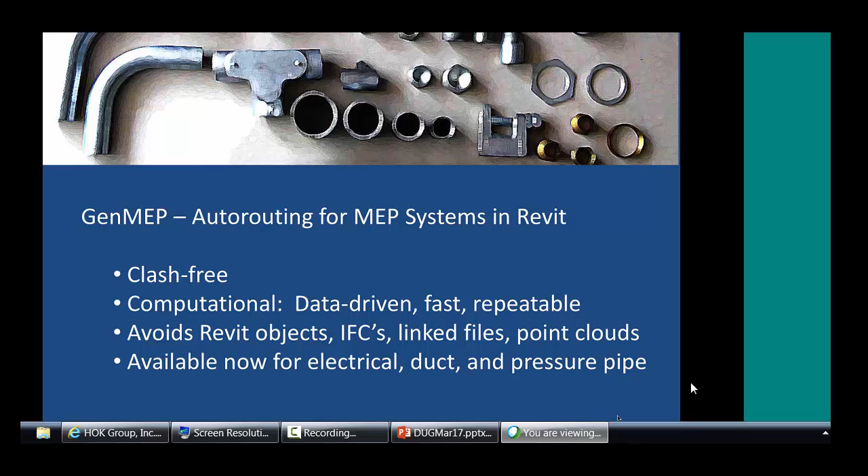And then quickly walking you through the two products that we have. GenMEP is an auto-routing tool for Revit. You define a start point and end point, and it'll auto-route between the two. Ben will go through a bunch of examples showing that work and what that can do. And then ClashMEP is a real-time clash detection tool for Revit. So as you're modeling within Revit, you get real-time interactive feedback on what you're clashing with as you model. And that's a product I want to show to you and get your feedback on how it could best integrate into Dynamo.

The technology of what we do is pretty technical, and if you guys want to talk afterwards about what that means. But generally, whenever we do anything involving our tools, we create a voxel space, and then we route through that maze. So imagine building a Minecraft building from a Revit model, and then we use that to either auto-route or do clash detection against it.

And then there are a bunch of algorithms that we've customized and adapted to be in 3D and to be appropriate for buildings and to have enough intelligence to look like a conduit or look like a duct. And that's a picture of what it kind of looks like when you go under the hood and take a look at everything.

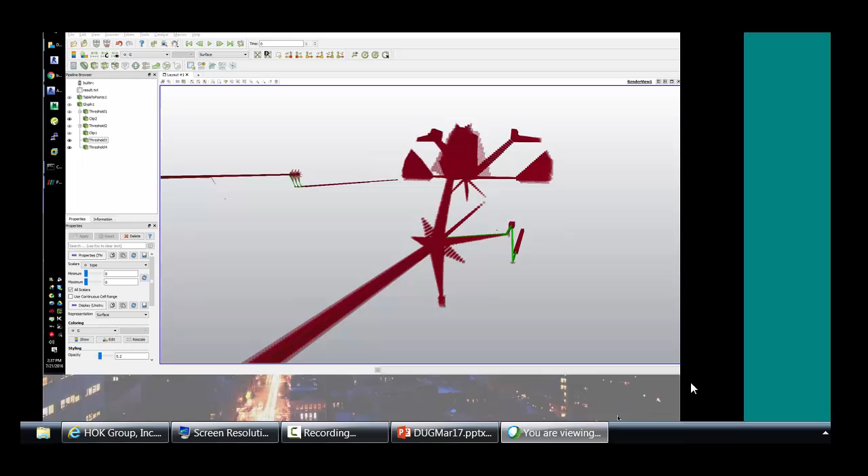So with that, I'll turn it over to Ben, and he can walk you through demonstrations of first, how to do generative design within MEP and how you come to an optimized outcome, medical equipment tracking, including the automatic placement of electrical outlets for that equipment, and then congestion complexity characterization with Dynamo.

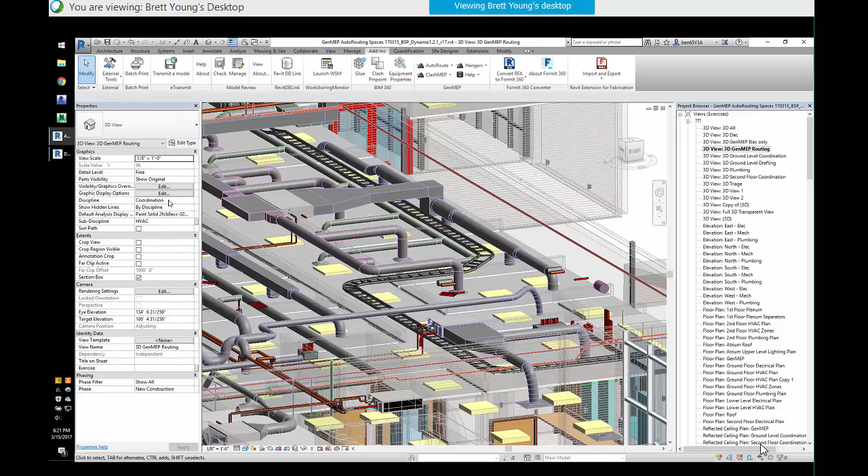the basic way GenMEP works is you click on a straight piece of MEP system, and then you click on another straight piece of MEP system, and then we route between the two. That's point A to point B. It's very simple that way. Finding the solution between the two is not simple, but it requires users to place the start and target points in a decent location, basically, for the route to be something that's buildable.

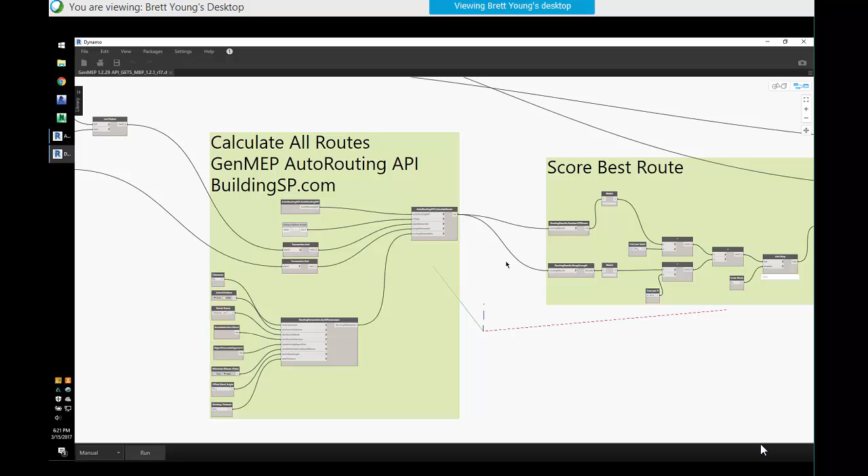And so what we've done is open up our APIs to our routing engine, basically, to route between the start and target points, and then find the solution, and then do some math behind the scenes. Excuse me. So I'm going to walk through my different nodes here. I apologize for my mess on my canvas, but, you know, it works.

So we have a couple groups here in the beginning that create what we need to route for a GenMEP, which is a start stub of system and a target stub of system. And I chose to put them in various places. So we're going to take a look at where those are located, and we'll run it. Okay. Let's just see here.

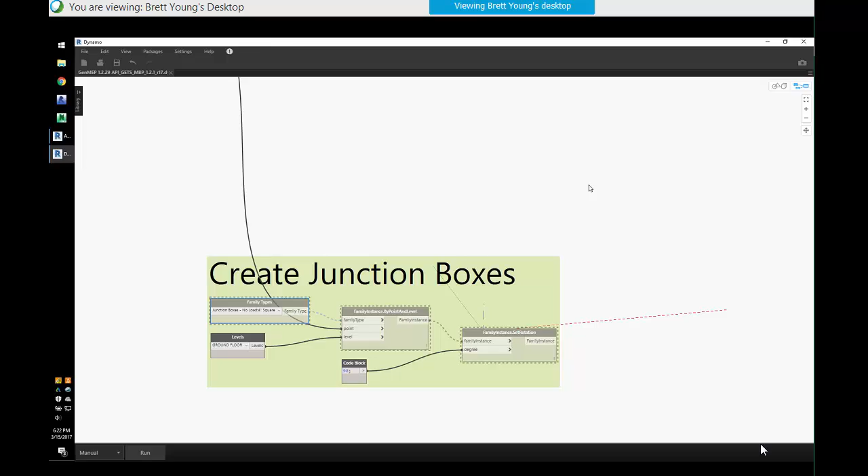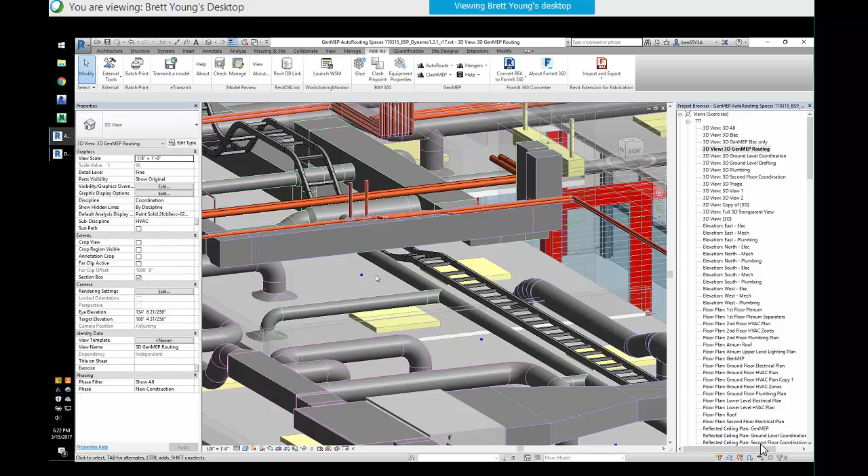So what we have is we are about to try and route between these blue points. We have 40 routes in a grid, arrayed at different elevations, and we're going to test elevations to see which is the best way to get across the building at a horizontal plane. These blue dots are the target junction boxes for home run routing. I'm fixing the location of the target and just varying the start point to figure out which is the best start elevation for this test.

I'm going to unfreeze these guys. So we've got the actual node, or actual group, to make the junction boxes at the target points look nice, and we're going to unfreeze these.

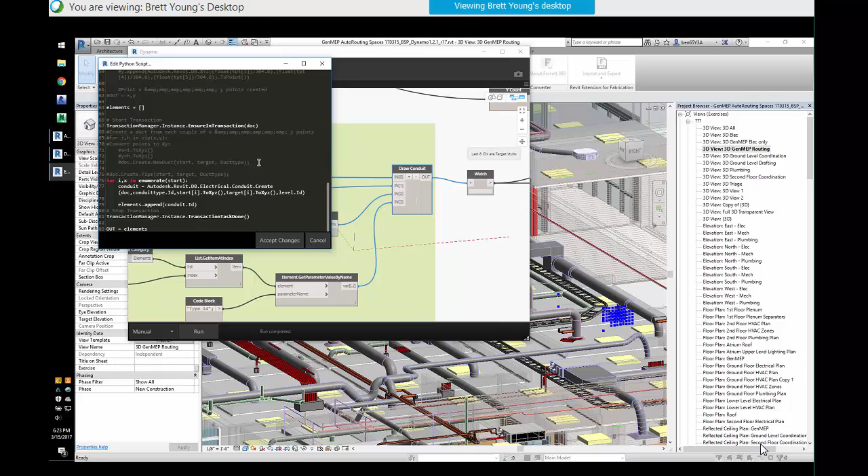I feed into this Python node here start and target information to basically say, hey Revit API, draw a 1.5 foot piece of conduit between this XYZ and this XYZ to give me a start stub. We can walk through that Python - that's where I get out of my element, honestly, in terms of what's going on. As you can imagine, you read an example online and make it work for what you're trying to do. But start to target stubs get generated, and then we feed it through the GenMEP routing engine.

So we have some choices here - the routing parameters for each of these routes. We can choose the offset bend angle. 45 degrees is kind of a standard electrical bend angle to use for routing. We're choosing to use 45, but we could vary that and input a list of different bend angles.

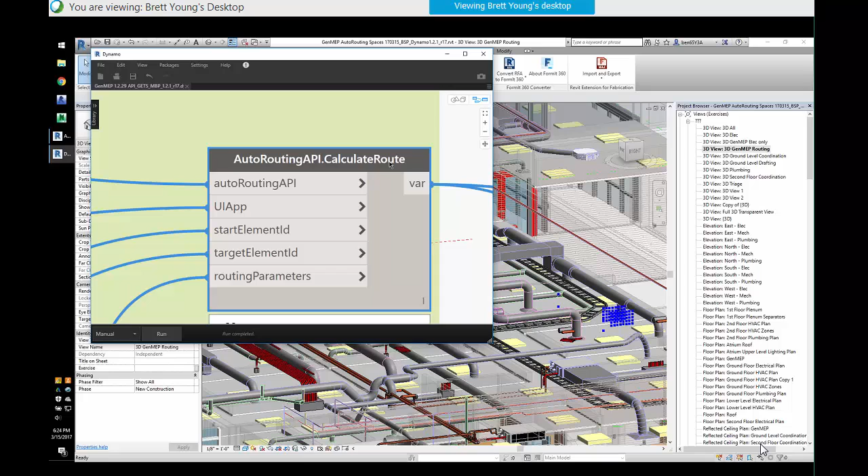There are different options we can do, but basically this right here is the key. This node is created from the Revit GenMEP DLL that we include with our installer - that's basically the routing engine. You supply start and target points, and routing preferences, and the output is solutions from the GenMEP routing engine in Revit. We just happen to make it an automated process as opposed to a manual process, the way GenMEP works inside of Revit right now.

Okay, so we're going to run it and see what we get here. It's easier with data in those nodes than empty nodes. So we're running 40 routes from various elevations, sets of 8 that work their way across the building, and we're going to get 5 different sets of scores for which elevation is best.

Is this looking for clashes now? It is finding 40 different solutions. They're all clash-free solutions, so we're running our algorithms through the maze to find 40 different routes, but they're all clash-free, so they all technically can be built - but which is the best way to do it is the question.

So if you look, we have a way to quantify a route. One route has a certain amount of elbows or bends in it. Each of these 40 routes have 7, 3, all these various quantities of elbows, and they also have different amounts of length.

So if you apply a cost function to them - and I'm doing a very simple one - it costs $13.04 for every bend, and $4.12 for every linear foot of system. Multiply that together, and for each of the 5 elevations you get a sum, a score. Now these dollar amounts might be in 2008 dollars, I don't really know, but they're comparable to each other generally at this point.

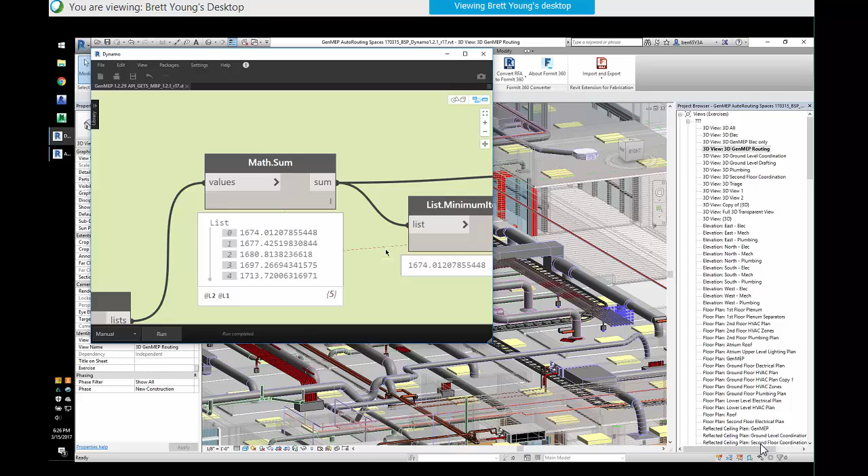So if we look at these different scores, solution set 0 has the lowest score here - 1674 is a low value in the score function that I built. Now some people might say cost per linear foot should be changed, and you can apply a whole different approach - there's a lot of special sauce that can be built into cost functions.

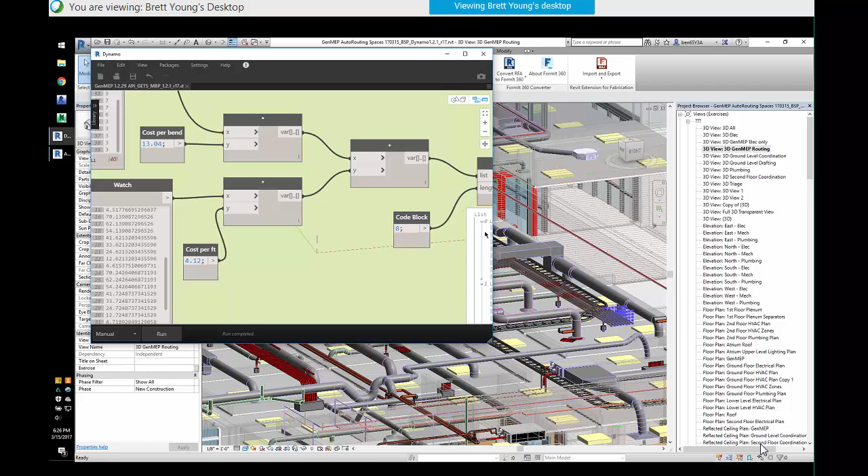So over here in Revit, you can see the blue points were my start points. The elevations above the bottom one were determined not to be the optimal solution, so I deleted those routes totally, and we picked the bottom elevation and routed it for real in Revit and kept that solution. As you can see, these 8 routes work their way across, each one dropping off into the J boxes as they hit their targets.

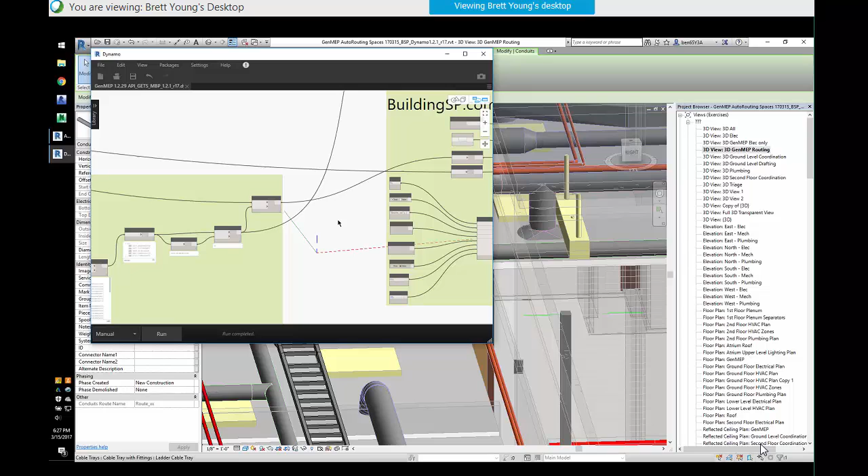So the scoring method gives us a measurable way to compare different solutions. I can add more elevations, add more granularity, and try different elevations. We're just limited by how many tests we want to run, basically, and how good of a scoring method you have.

There's a lot going on in this specific one. Go ahead.

It finds routes. GenMEP itself is a software product that finds its way through a maze by not hitting anything, using algorithms to work each route. We grab the geometry that's obstructions in a Revit model, so all geometry that's in the way, we extract that out and take a look, then use basically video game algorithms to find their pathfinding way through the maze.

We have linked models, IFC models, point cloud. So we know the routes are good, but as you can imagine, there can be some crazy solutions on finding your way through a maze that you're not going to want to build that way. By putting a cost function to the elbows and length, you can really compare one route to another and weed out the outliers to say, well yes, the wire can be pulled that way possibly, but that's not really the way it's going to be built.

So I want a pretty efficient route to get to the building part. Clearance issues are just spots that can get through, but not very easily.

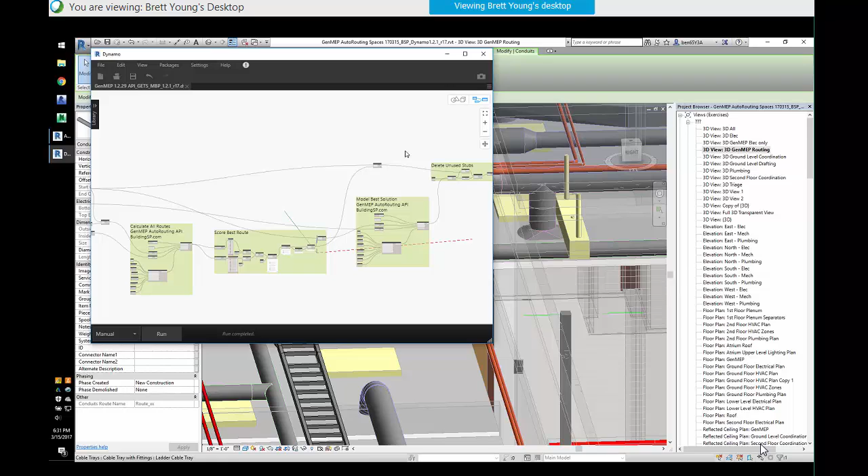Let's see, specifically in this example, they're going straight out of the start and working their way at that horizontal plane at 2'3" in the plenum, which I think is around 10 feet. So they're straight from the beginning, but then they hit that duct obstruction, so they have to go up or down.

I see what you mean. I thought you were talking about at the start, you either are at one point or another point, if you kind of go straight out from those start points, and we just run into something at some point. So I'd like to get over that duct, in theory, but the steel's in the way.

It turns out in this example that there's not enough room above the duct and below the steel to work its way through that way.

So Ben, using Dynamo, defined all these points here, and then went through and fit tested every elevation here at about a 3 or 4 inch iteration. And then we scored it again using Dynamo to come up with the most optimum group, or most optimum starting elevation for this example.

So that may not have been entirely clear, but all those things were happening when he was writing the script, and that was what the dynamo example did. Validating those points first and then generating based on what's... they have to succeed first, and then they get a score, and the best ones that actually got a score are compared to each other.

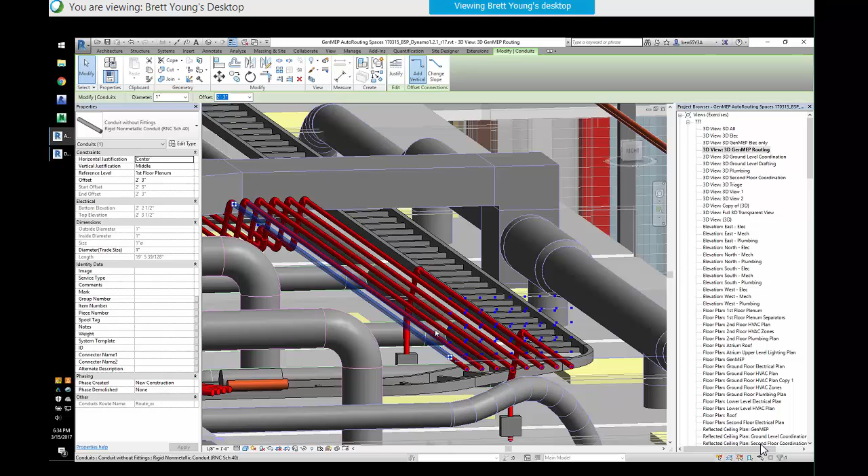Yeah, I think we only had one proprietary node on it. You want me to show some? Walk through the script - I'm just curious what's drawing in, what your inputs and outputs are.

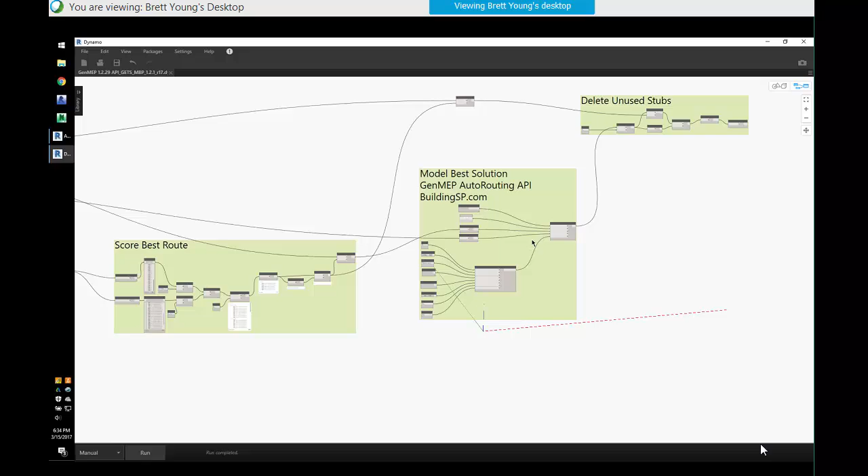What we're describing is what we call the on-ramp of optimization. So you tackle optimization in a growing way. If I have a point-to-point route, I can optimize one route. If I've got 8 of the same type of system, I can optimize all 8 of those - and this is an example of that.

After that, you can go, well, I've got 8 conduits and 1 duct, and I want to optimize those 2 systems to come up with this solution. And once you've done that, you go for all the systems, and once you go for that, you go for the entire building to optimize it.

So in that example, the good question is, if you had lowered that duct enough to get those 8 conduits over the top of it, that might have been a more optimum project solution, or it may not have been. The traditional thinking would be that duct is expensive to move and you wouldn't do that. But if that had no cost to you, you could do it easily, and it would have a savings for the project - all those conduits would be dead flat over the top.

So that's what we call the on-ramp of optimization, how we're marching down that optimization path using things like scoring. In my opinion, going after more complicated ways of scoring a conduit isn't as important as tackling how to score a duct and combining the two, because that gets into a systems approach, which is more important than refining how you score a conduit.

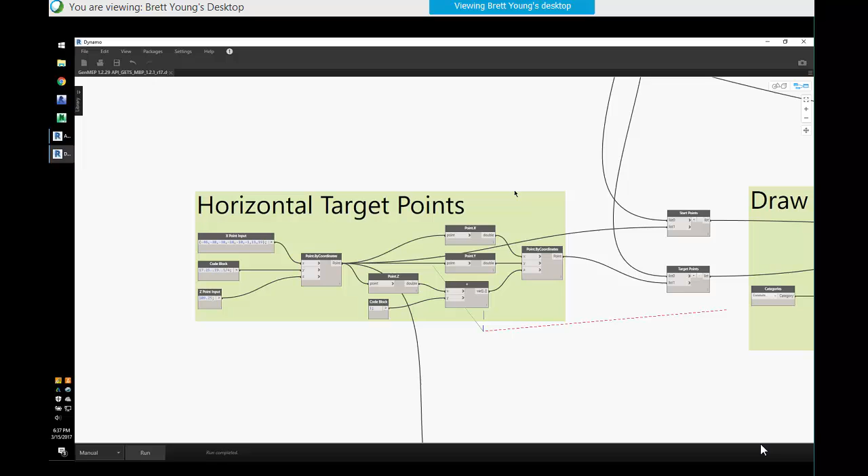So the actual Dynamo-ness of this at a basic level, you tell me if this is what you want to see, but I don't have anything complicated in here. It's just lots of out-of-the-box Dynamo nodes, list management.

But if we want to talk about the target stubs that I drew in here with Dynamo, they are 1.5 foot stubs coming out of this JBox, right? So going from a Z value of 109.25 up 1.5 feet, maybe 1 foot, is what we're doing here, right?

And so if anyone has any questions on how this worked, but as you can see, I had to manually place the X and Y values of these start and target points just by taking a look at where we were in the plan and watching the points appear and then kind of fudging them around a little bit to get decent places where they should go.

There's an automation example of how to make the best placement of these JBoxes as well, not just a fixed location of these target points. But these are fixed and they're hard-coded. But there's definitely some variables that can be placed in this part to get even more solutions to build.

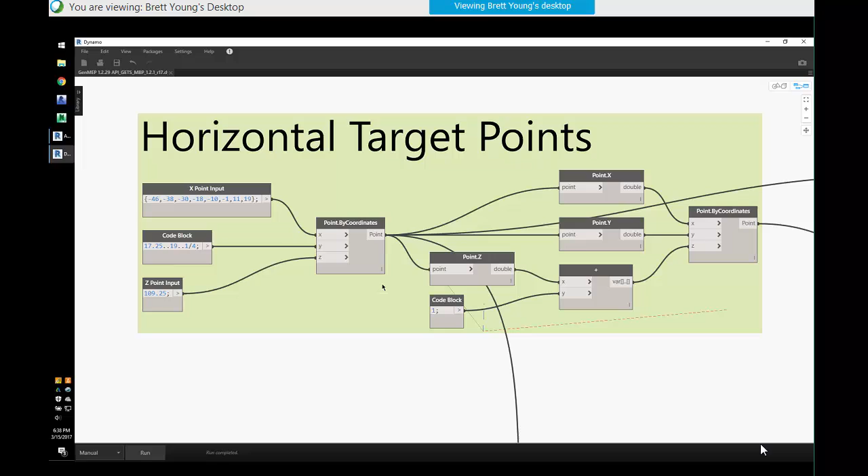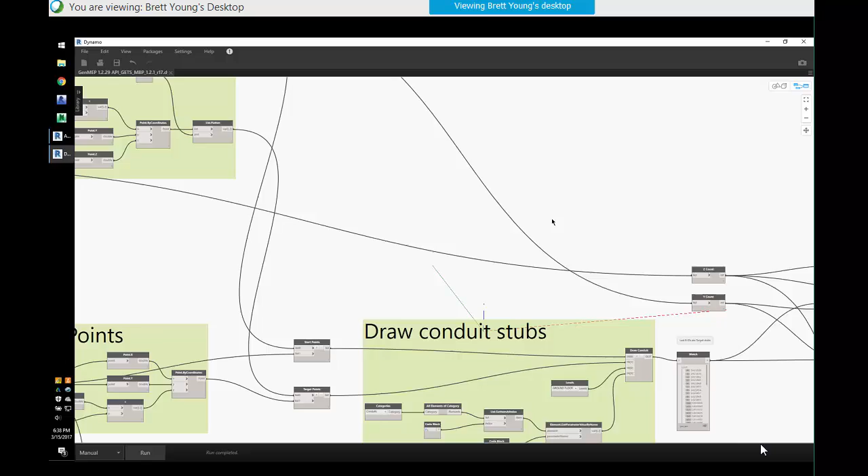And all I'm really trying to do with this group, horizontal target points and horizontal start points, is build a group of points that are in the same plane in 2 directions with a certain length, and then have the Revit API using a Python node here draw a system between the two, because that's what GenMEP needs as an input. And it's like someone drew it by hand, right? Draw a little piece of system, draw a little piece of system.

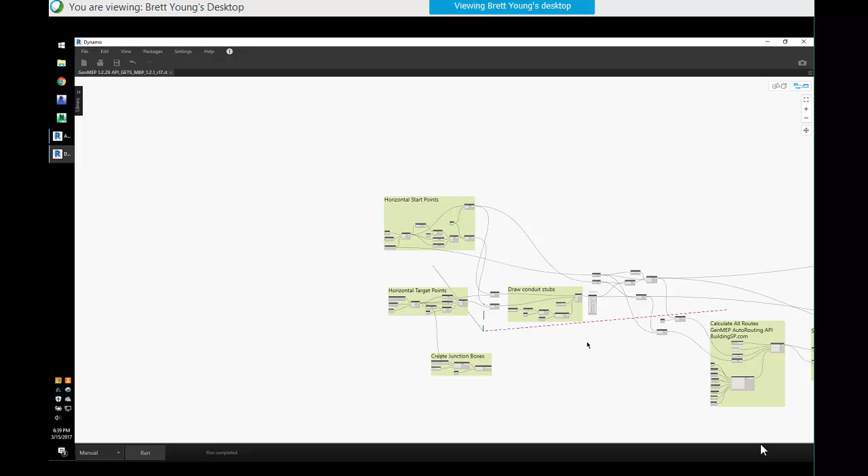So the whole left half of this is just drawing a foot or a 1.5 foot long piece of MEP system in Revit at various places. That's it. In the future, it should be a database call that interrogates: go find the JBox, go with my single line diagram, find where I have to go and find out where I'm coming from. And so that should really be a database call someday. Or a Revit database call.

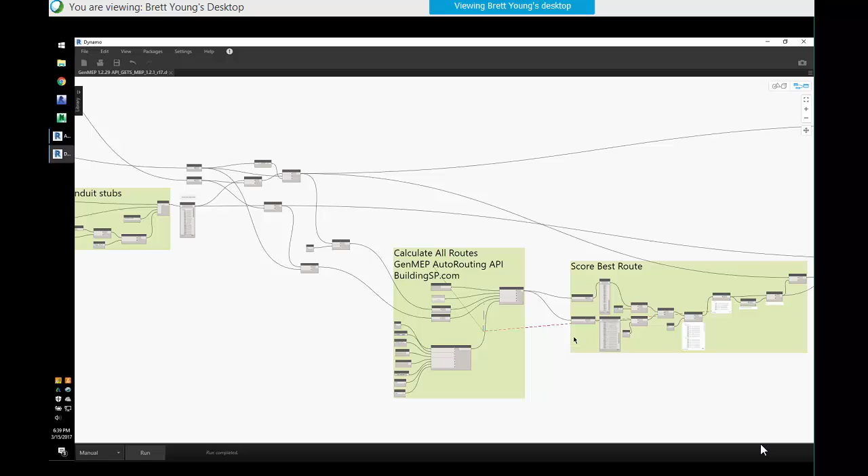Yeah. You could probably find a way to select both of those test boxes or automatically get the location of those rather than manually entering them. Yeah, the thing is, we need to know what connects those two. And so the junction box itself, a generic family, doesn't necessarily have what size and what type of system is connecting between the two.

So Revit load information might be able to size the conduit automatically: this is under 500 watts, so it's probably 3/4 inch conduit, or some number like that. But we need to know in general what Revit conduit families we actually want to connect from point A to point B. And junction boxes usually don't include that. Custom junction boxes probably could, with an electrical connector built into them maybe.

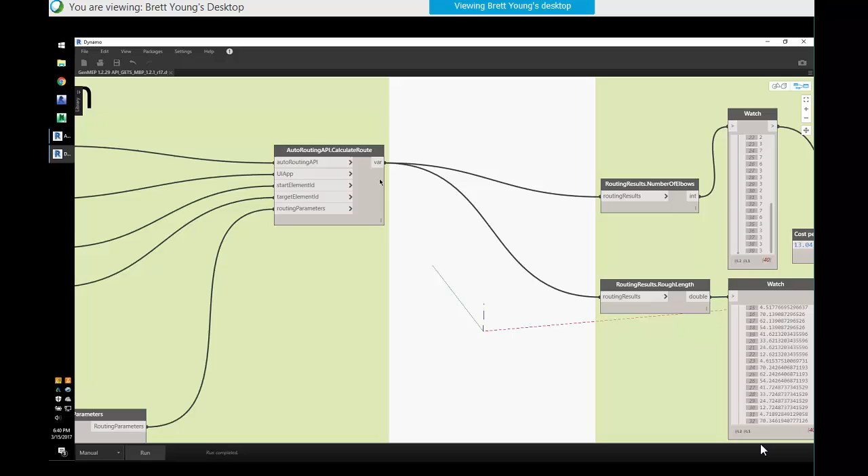So we can come back to this. I'm going to post this online, and I would like to hear any and all feedback about it. The scoring we'll walk through real quick. I think it's probably the most interesting part. So the proprietary node is this calculate route, which is generating the solution from A to B. And then we have two more custom nodes that pull a number of elbows and rough length from those calculated solutions, but not modeled solutions, right?

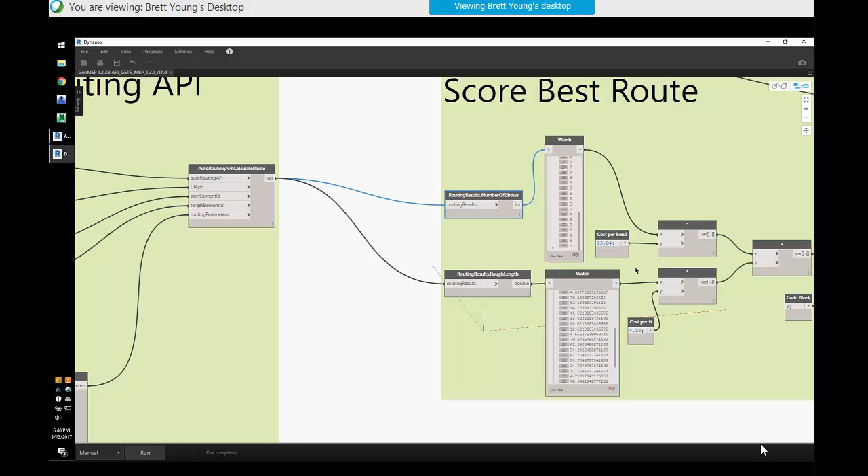And to talk about that calculate route, what that means, we're calculating the route without modeling it within Revit. Because if you model it within Revit, you get a higher overhead and more lag. So we're doing a fit to make sure that we find a polyline, and then use it to calculate. We find a polyline and then we draw the conduit on top of that polyline. Yeah. So if we don't have to draw it, we can just use that polyline as a distance. We know every time it turns.

Caesar, do you have a question? So do you have to have the BuildingSP API installed in your machine? You do. Yeah, you do. The other two examples I'm going to show do not require that, but this one does. But I think this is what we're most excited about, I would say.

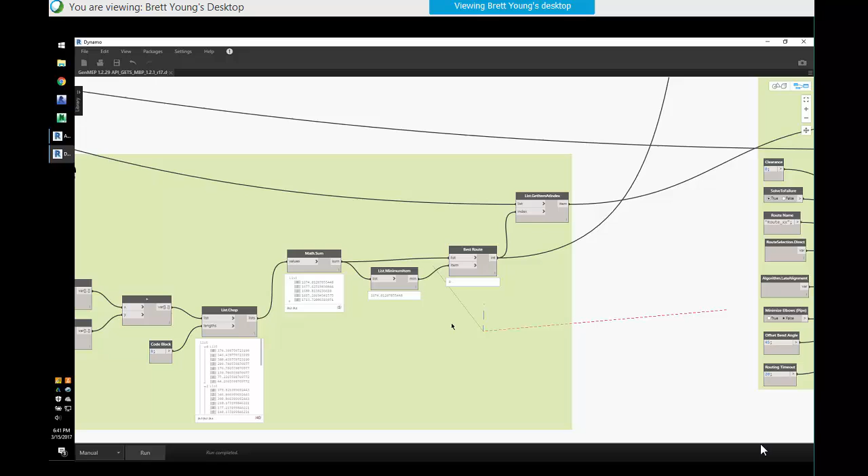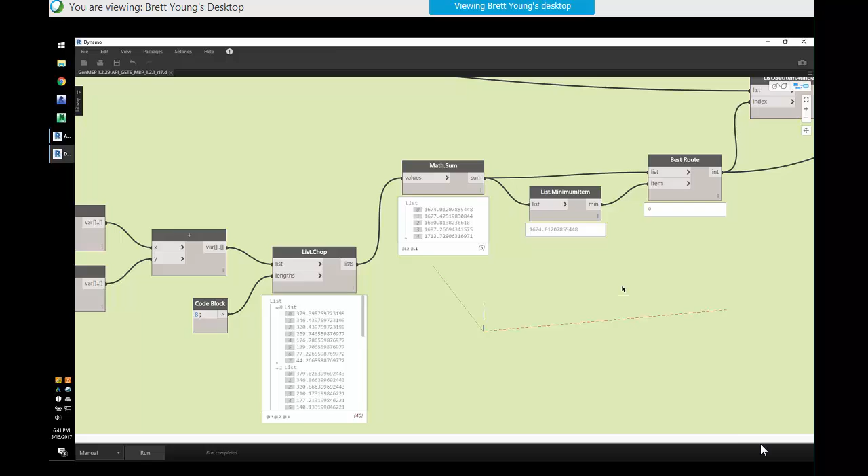So again, multiplying an elbow times a cost is easy using these nodes, and it's a good, decent example of moving math around here and finding the best solution. The last group here is, instead of just calculating the route, we want to actually model it in. So elevation 111, forgot to show that at the very beginning.

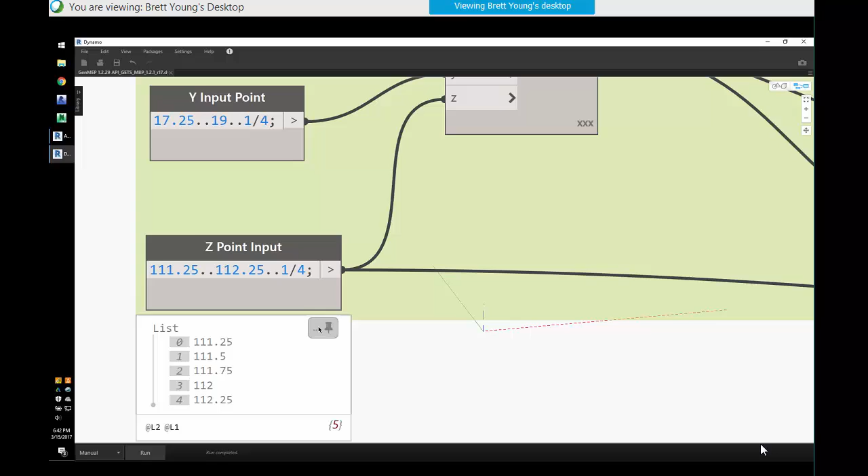So my Z elevations are 111.25, 111.5, 111.75. These 5 elevations are the elevations I tested. So route set 0 at 111.25 feet is the solution that worked the best. So at the very end, I feed that elevation in and say route from there. Use that solution and actually model it in, if that makes sense.

Okay, and then I delete stuff. All right, so that one's good. Let me back out of this.

So while we're loading here, the next thing I would like to show is something that myself as an electrical engineer seem to run into a lot as a problem: tracking mechanical, plumbing, medical, any kind of equipment that needs to be provided power by an electrical engineer, right? So you're sitting there waiting for documents and waiting for other trades and other people's information about where in the electrical world systems or a piece of equipment need power, right?

And so let's keep moving through the design process, and it'd be nice if we could just wait till the very end and provide power when we need it to where all these medical devices are, for example, in this example I'm talking about here. But is anyone else an electrical engineer? Is anyone else facing that problem day to day about designing for other systems that need power?

I mean, that's what I feel like electrical engineers, all we're doing is reacting to air handling unit loads. Water heaters were just added. Interesting. That just changed everything. That kind of thing. And so it seems like a simple thing to be able to figure out where the mechanical or medical equipment is and make sure it has power, but doing that when there's hundreds of units and making sure it's always accounted for is what electrical engineers spend a lot of time on.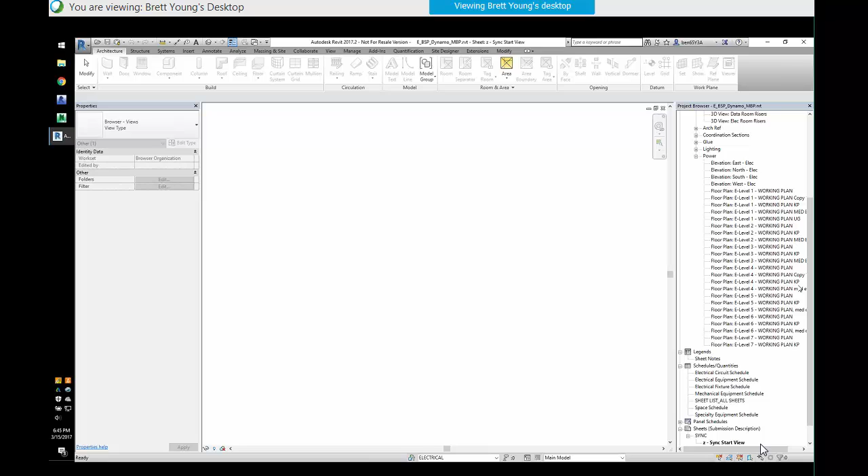Okay, so in this example, I'm looking for a list. Someone gave me a list and says, everything in this list needs power, needs a receptacle, this whole building. For example, Med 101, our refrigerator 1382, those are pieces of medical equipment that need power. There are multiple refrigerator 1382 pieces of equipment in this building, and they keep moving. So find where they are, put a receptacle there for them, and then make sure it's always there for them as they move around the building in the design.

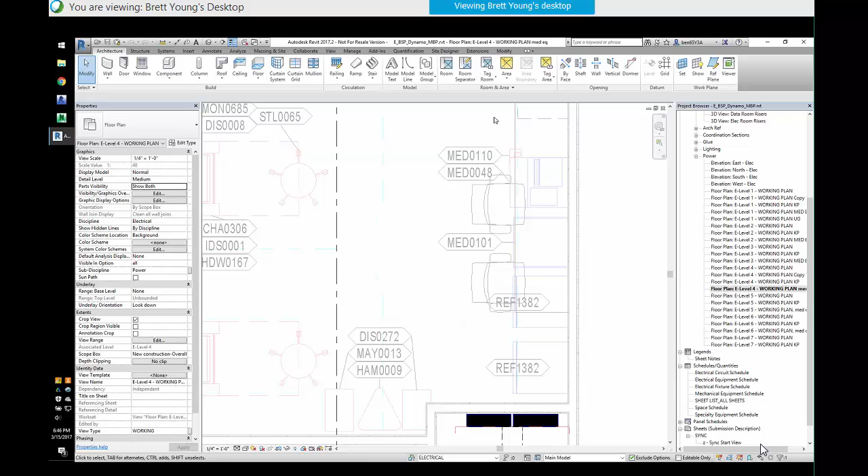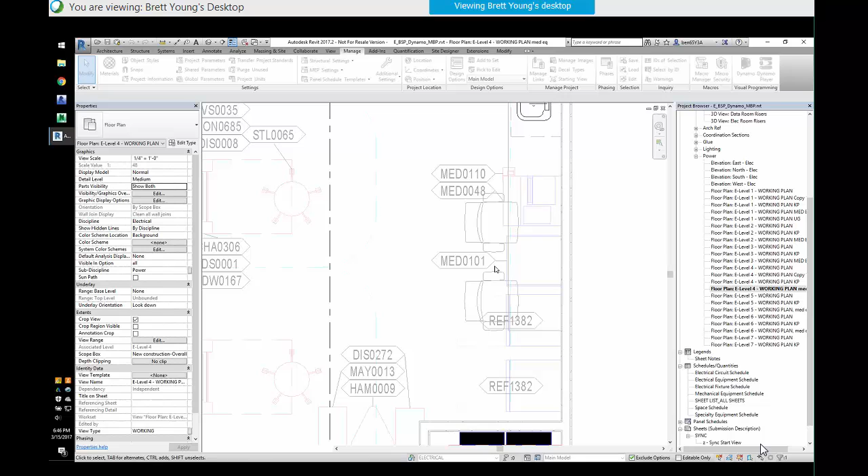And so it was frustrating to keep doing a lot of guessing and checking, and there's no master list of how many things we're looking to try and find. So I like this example. Manage. I think it works pretty well for what it's trying to do. It's not algorithms through a maze finding example. This is Dynamo core saving me time at work, right? So this is some basic stuff, but I found it to be very helpful.

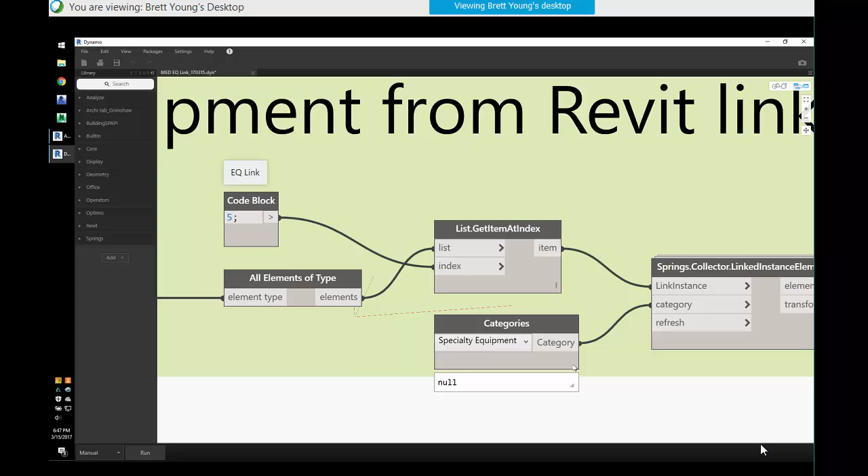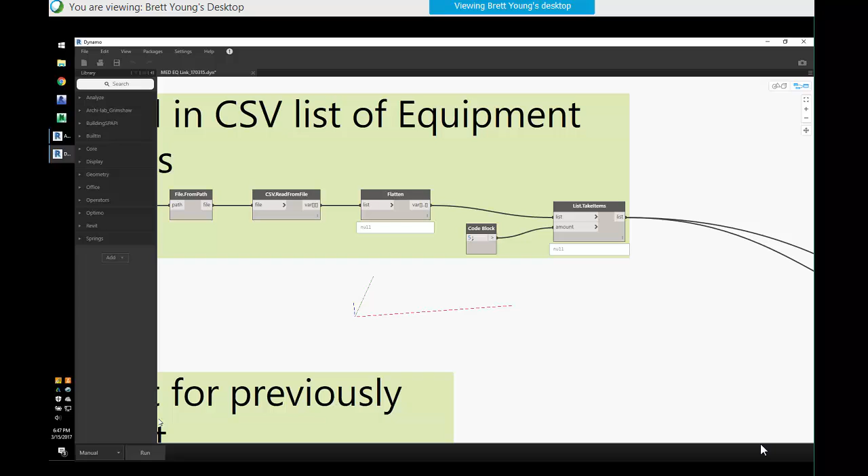Okay, so we're going to read it in with our Springs node, right? So we're going to bring in all of the list of specialty equipment from a specific link, link number 5 in this model. So we have a list of elements. What we're doing here is going to use Dynamo to put a receptacle at each XYZ of that piece of equipment. So I'm going to do that real quick, and then we're going to come back and look at it and do another thing here. So I like to have stuff in these nodes, talk about them. I'm going to run it for the first 5.

I have a list, a CSV, for example, you could get from a PM on a project or whoever, even from the medical equipment guy, right? This is the list of the 50 device IDs that need power. So air handling unit 1, air handling unit, whatever it is, you can get a list from somebody and say, this is the list, maybe even the loads of those devices. This Excel thing could work in a bunch of different ways, but this is just a list of device IDs I'm looking for, equipment IDs, excuse me.

But yes. I'm an architect. It's easier to say if something's powered. You may not have a cut sheet, so you may not know the exact power for a while. But you could say pretty easily what's powered. Right. Yeah, just a flag, even the yes/no instance parameter thing.

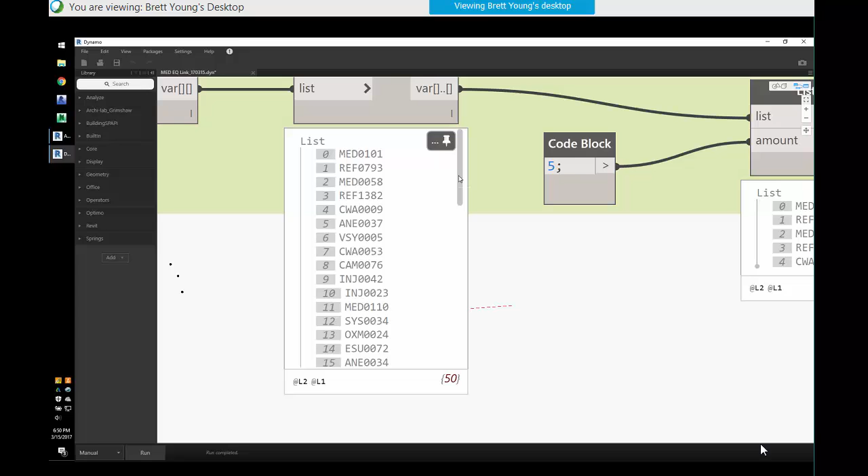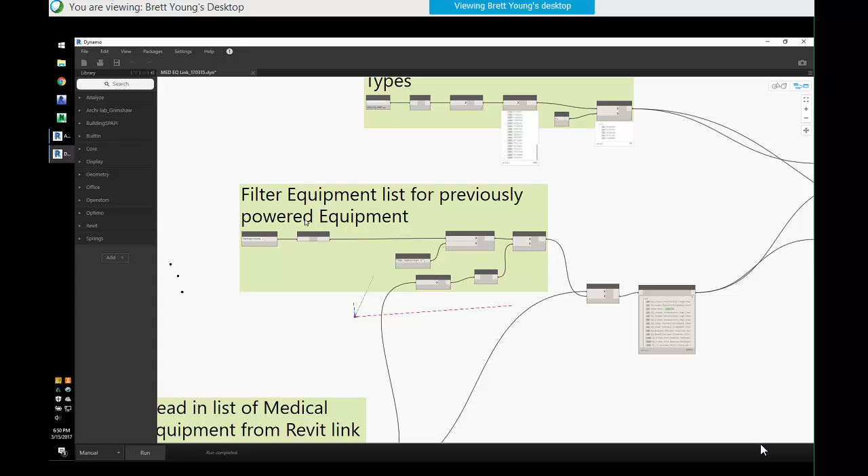So in Dynamo, we're looking at the list of 50 pieces of equipment that I need to power, right? Med 101, refrigerator 793, refrigerator 1382. In the beginning, I took the first 5 just to talk about it and run it. But again, refrigerator 1382 is in this building more than once. So I have my list of equipment. This filter list for previously powered, I'll show you in a second because we haven't run this yet, and create list of instances of power, we'll come back to that.

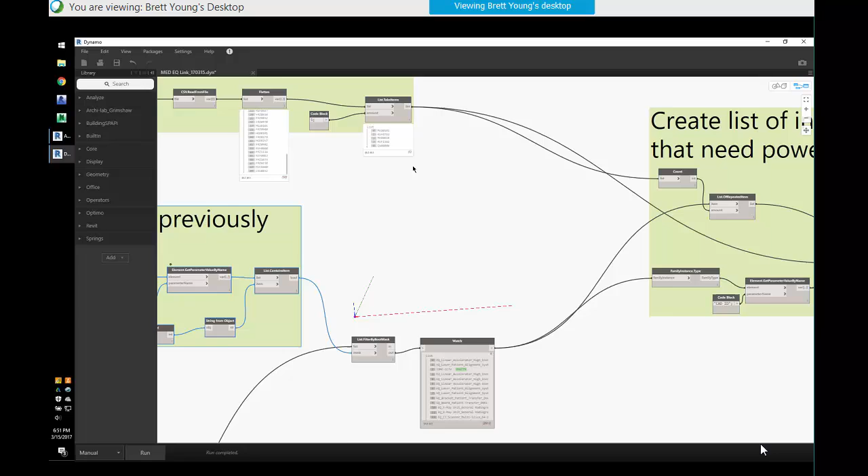But basically, excuse me, I'm jumping all over the place, I find where those types of equipment live, and it turns out there are 50 locations of those various types, Med 101, 1382, right? The first one was Med 101, and it happens to be in about 15 places in the building. It has the same load, it needs a receptacle, but I have to track those down and find them all day long. The second one needed only 8, and refrigerator 1382 had 3 of them.

So what we put in was these 3 receptacles. They're not in the right place. They are floating. Where they got placed was the exact XYZ base point of the family that the medical engineer created, right? So for this refrigerator, the base point happens to be directly in the middle of this 3D box. That's not where the receptacle needs to go. But if I know that all refrigerator families have an offset of the width divided by 2 and centered on the wall, I can make this actually put it where it's supposed to go, right?

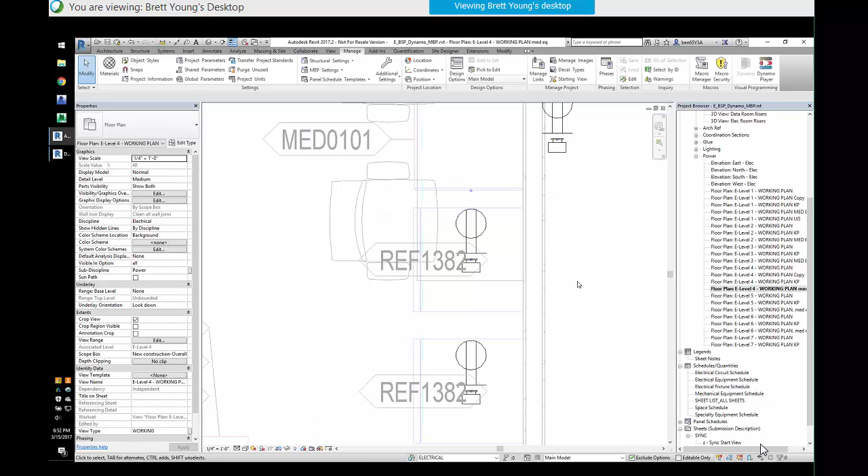But at the end of the day, if I have to come through here and move this around and do this, right? Now I have confidence that I have all the refrigerators modeled and powered. That's great. And so what we inject into those receptacles that we need to power those pieces of equipment is the element ID, or the GUID, whatever that number is right here. 1384516 is the device ID or the element ID of that specific refrigerator that we were looking for in the first place. So I pass through that information as a field into the receptacle that gets put in there.

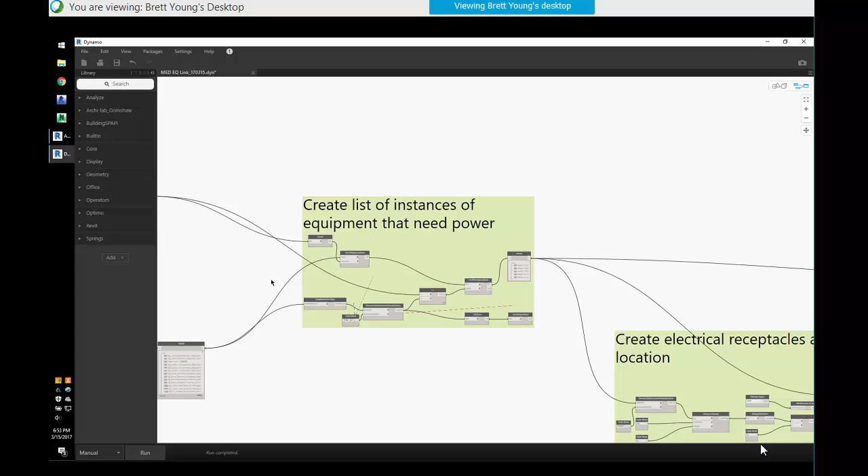And now, say a week later I run it again. There is going to be nothing for me to find other than the 2 or 3 different refrigerators that got added. Because I put that GUID in there, I'm checking on step 1 to make sure I'm reading all the receptacles in here, and I want to know what the subscript 1 values are for all of them, right? And then if they happen to have a device ID, those get filtered out along with that name. So at the end of the day, I didn't put any more receptacles in round 2 because those first 5 pieces of equipment are already placed.

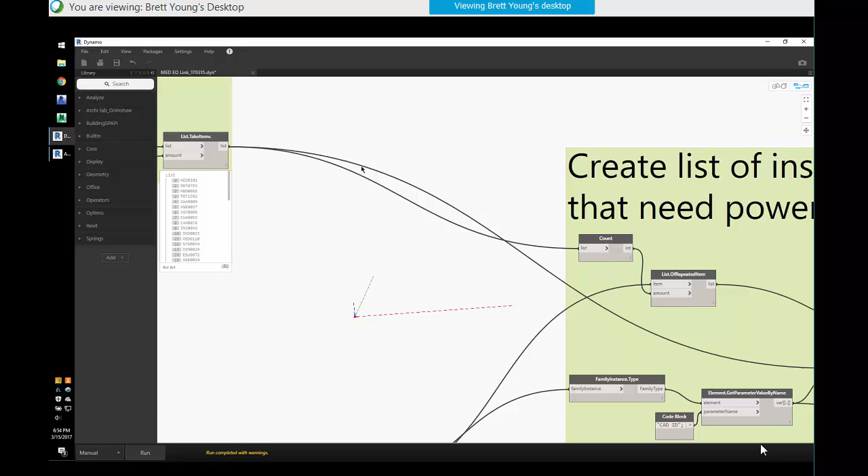So if I go from 5 pieces of equipment to 50, the full list, it's going to run. The first 5 are already placed, but you can run this every day to make sure that your receptacles are always matched up with a piece of, oh, that was faster, cool. So the second time around, the first 5 were empty, but now we have 142 extra receptacles that just got placed all over the place, and they have the device ID of the host piece of equipment, and they have this little special flag that I put in there in case I want to delete them all in a group.

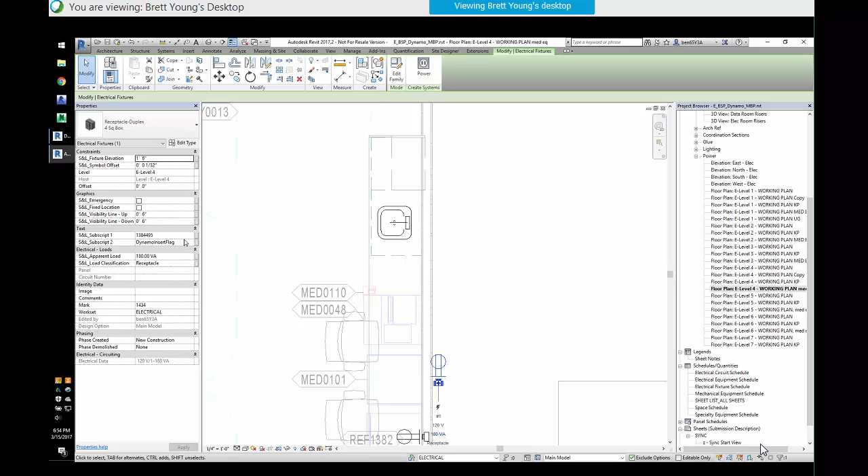It helps a lot to have confidence that you have a receptacle for each piece of equipment, not to mention you can keep the circuiting and run this again. It doesn't destroy all the electrical things if you need to keep the receptacle in, so you can circuit it along and not destroy the whole deal. I'm not sure if anyone has done electrical circuiting in Revit, but you can't swap in a piece of equipment after it's been circuited. It kind of throws it all into a loop. But you can move it around. All basically we're doing is looking for that device ID in that comment field.

So part of what you're doing is auto-populating receptacles based on the list. Yeah. And part of what you're doing is kind of a change management type of packaging. Right. If I run this again, we're not going to find any changes. But the link changes next week. I can run it every morning, and it'll tell me, hey, I added one receptacle. Here it is, by the way. You should go take a look at it and make sure it's on a wall.

So the adaptation of the script would be to add in being able to find the closest wall. I would love that, yeah. And then put it in a preferred location. Right. And the optimal elevation for each piece of equipment. But, yes, there's more to it. And even adding, if there's a unique keynote to each of these pieces, a note that we want to add to all fridges for some reason, or a tag that says plus 46 inches AFF, those can be added with specific information about each of those. We can pass through load. We can pass through a bunch of information to those receptacles to keep it synced up.

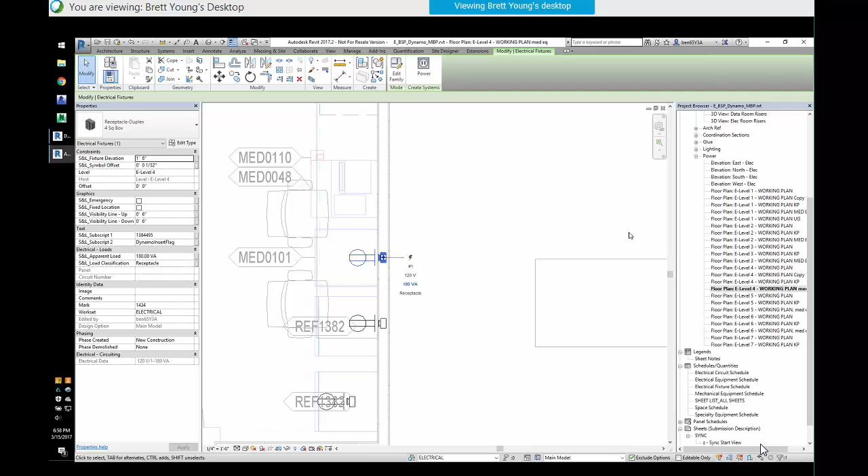But right now, you run this, then the equipment moves, the receptacle is going to stay over on that wall, and it's not going to be near its friend, but at least you'll know what it's trying to power. It'll have that device ID, and we could even have it draw a red line between the receptacle that was placed and the element ID of the thing it's trying to power. And you can notice, hey, this is way over there, visually or something like that. So there's a lot of different ways to check that.

I tell myself, you only have to do this once, and then you can do it on every project. So it's probably worth the time in building and building and making it work perfectly. But this is a pretty new thing, and I'm liking how it works right now. It's not that complicated. I think the only node that I'm using is the Springs node to get the linked piece of equipment in.

How much time do you think you save on the project? Because I'm guessing that people who use Dynamo are probably within their firms trying to justify their time a little bit. It took time to go and write that, but how much time do you think you probably saved over the lifetime of that?

You probably save at least a half a day per floor, per 50 pieces of equipment, I would guess. So this project that I'm looking at here has 6 main floors of equipment. So every time you run it, throughout the life of the project. So that's only one time though. Every set. So at 100% DD, you have to run this and make sure you covered all your equipment. You run it again. So it's probably 4 hours per set per floor, as my guess.

And so the same logic could be extended to any type of fixtures, basically. Oh yeah. Signs or security devices, cameras, or ceiling mounted. At the end of the day, we want architects to tell us where everything goes, and we'll just read it in, and then we'll automatically place it there. But it really lends itself towards a data-driven approach. Right.

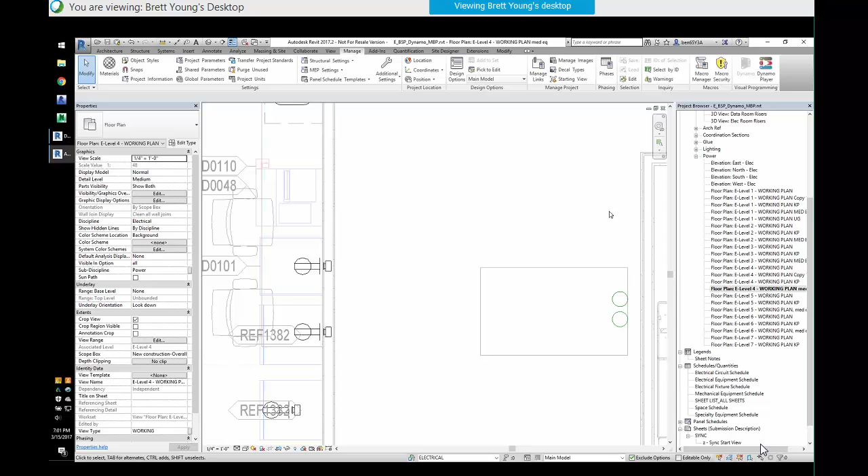As long as we're talking in the same language, we can follow those things around. Can you also apply that we read the tag information, then go to the Excel file to find the power we need to provide, and input that back to the receptacle? Right. This Med 101 has an amp load on it, this family. It's not great, and they're not necessarily in electrical.

Even though their equipment has no parameter for that, we can still use Dynamo to read it. Correct. Or even the equipment schedule, or the manual way that on those cover sheets the equipment schedules are listed. As long as we're talking about Ref 1382 and there's a line in there, we can use that as the key to everything, whether or not it's in Dynamo. It can be the key to the whole piece of equipment.

If we're all talking about 1382, we'll pull it in from multiple sources. We'll give it the load, we'll give it the location. Revit helps with the location. The load might be in some unique Excel file, but if we're talking about the same key value, it matters to the location of the receptacle. And I know the default is 1 foot 6 inches for the receptacle. So that might be another issue, another solution to read the information and place it at the right elevation.

You don't have to worry about the elevation and the power you need to provide, and then go to each receptacle and modify the instance parameters. Right, like one by one. So at the end of the day, I'm just trying to make less work for electrical engineers, it seems. I can say, hey, plumbing guys, can you at least tell me if it needs to be hardwired or a receptacle plug to power a thing?

So that can be a parameter that can read in for equipment as well. Is it hardwired? Is it a receptacle? That helps me automatically put in a family. But the plumbing people are looking at the cut sheets, so they don't need to put it in a table and tell me this necessarily. So it's again the data-driven approach. You read it in, and if we're talking about equipment that I don't own...

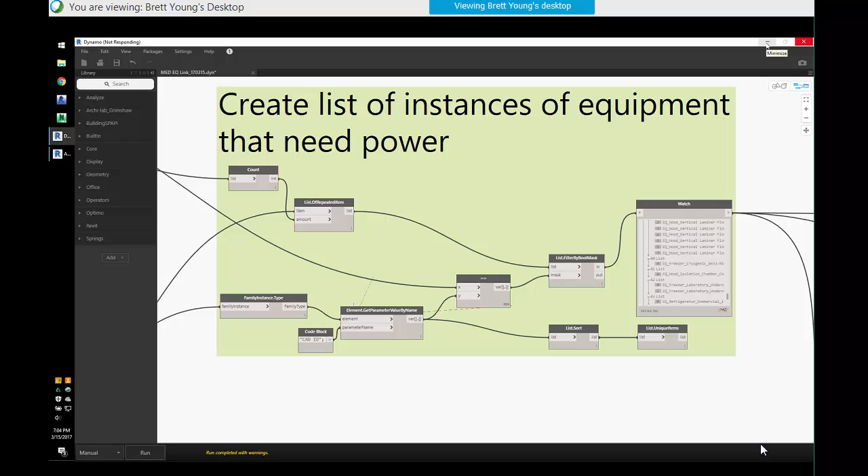Let's see - you'd end up with an extra outlet. But again, it would just be as easy as saying, hey, what receptacles are in this project that don't have a matching host? That's easy - turn them green, turn them red.

Yell at me and say, hey, by the way, these 6 things dropped out of there. I don't have that in this right here, but it's the same beginning script. It's saying, look at all these, match up the source device ID with what's actually on that receptacle. If they can't find a friend, then there's something going on, and take a look at it.

In some kind of index to the populated list that we're referencing for those pieces of equipment? Yeah, at least compare those two lists and know that they don't match. So I don't have enough fields, but I would love to have more.

So right now I'm showing subscript 1, subscript 2. Subscript 1 is showing the actual, the GUID or the device ID, excuse me, the element ID of the source, the Med 101. If I had a third field, I might say Med 101, the actual name of the equipment, right? Which I just don't have in this family at the moment.

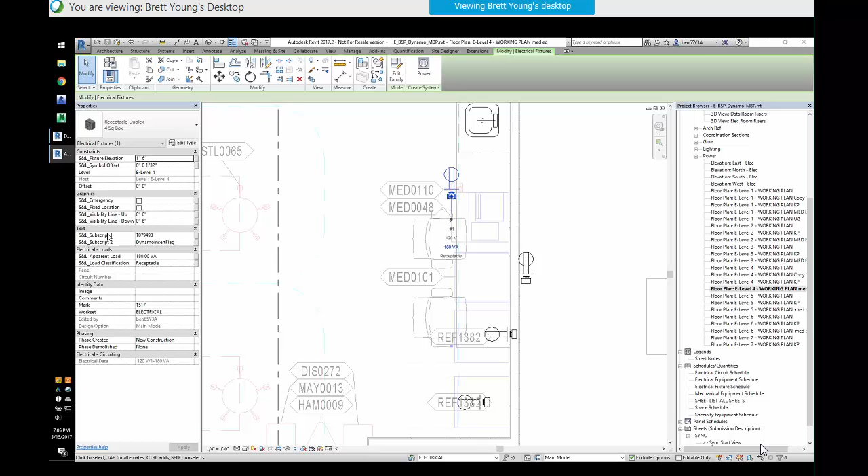But all we're doing in this beginning group right here is saying, read in all the electrical fixtures. Let's take a look at subscript 1. Let's bring in all these element IDs, and then we check does the list contain item, and filter it out, and then we get our list of stuff that we need to actually work with. In this example, there's very few because they're all already in there.

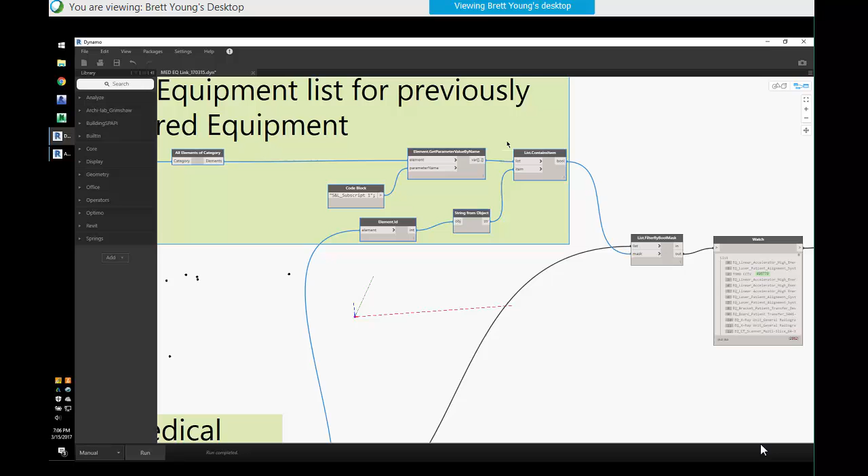But yeah, the filtering in this group is kind of the key on doing all these things about, did something move? Is it within 3 feet? Did something get deleted? Did one of our guys delete the receptacle and it shouldn't have been deleted? That kind of thing. Did you also make the receptacle a non-hosting family?

Yes, that's helpful. Yeah, I don't want to deal with hosting ever. I haven't found a good reason to host, but maybe hosting would help me stick to a wall. I'm not that good with families, so maybe there's a way to have them stick, but turn and stick, I don't know. But I don't mind doing the manual way of doing this and getting it on a wall. Like I said, if it's floating, that's okay.

Okay, so the good news is I don't have to run this one. It already ran because it takes 20 minutes or 10 minutes, I think. And it takes all my RAM because I have a huge memory leak on this script, but this file.

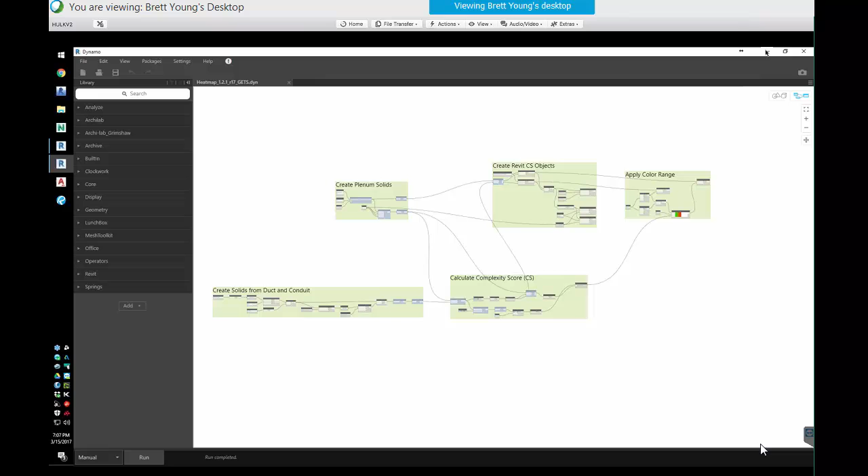But what we want to talk about is the idea of complexity in a building above a plenum. I'm going to give you the secret look there, but really what we're talking about is the same building we talked about before, right? So above the ceiling, there are these ducts and there are these conduits and there's stuff going on.

And we had the idea of building a way to measure complexity by a basic way of what is the volume in a certain 1 foot by 1 foot area. What is the volume taken up by an MEP system versus the extra space in that area? So is it 97% clear? Is it 50% clear? And so I'm going to show you what I mean here.

People know a conduit fill. You have a conduit, you fill up the conduit. Where is it? With wire. There's a ratio of fill to open space. We're doing the same thing, except for the area above the ceiling, in order to go and score how complex a building is, both within a given room and for the entire building, as an example.

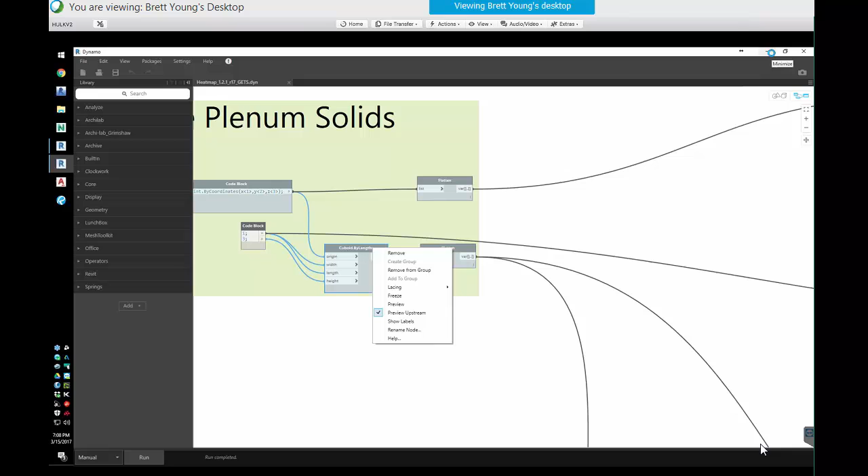So if you're going off and building a hospital, the hospital is going to have probably the highest complexity score over the entire building. If you're in a school building, you'll have, like a school lab for example, you'll have a whole bunch of complexity in the corridors, but when you get into the classrooms, it'll probably be a little bit better. And so what we're doing here is we're showing Ben wrote a Dynamo script to go through and characterize the entire building floor plan for complexity.

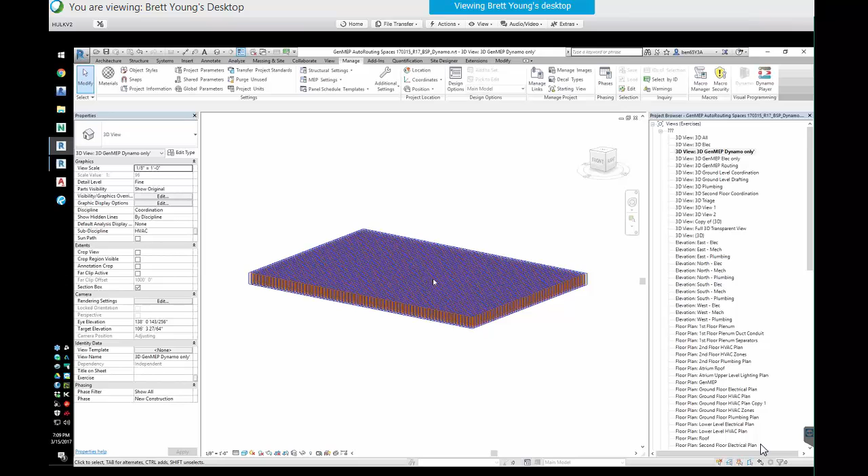And kind of the background of why we're doing that, the problem that we have as we go through MEP coordination is really related to how much stuff we put up in the ceiling, right? And so, I don't know how many people have been on a project when you're going through design and planning and coordination, and all of a sudden the owner goes, hey, I hired a low voltage guy, and you know where the cable tray is going, right?

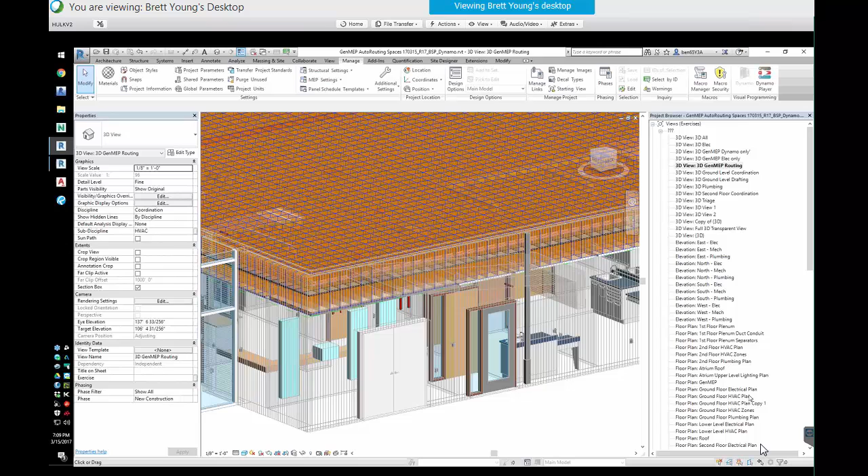Using this type of example and showing that map of what the complexity looks like, you can look at how the building adjusted to adding something like a cable tray late, or a fiber optic line late, or looking at why a corridor is particularly hard to go and coordinate. So that's a little bit of background on why we're doing that, and after Ben's done, I can tell you where we're taking this and where we're going.

So this is the result, right? We call it a heat map. If we look at the plenum space in a building, we can start looking at pinch points where there's a lot of stuff, volume of stuff in the way, or just not in the way, just there. Where do we need to start really focusing our efforts on coordination early?

Each one of these 1 foot by 1 foot boxes here, I have them all over, has a complexity score associated with it. I'm going to show you what that score is, but it's really simple, and you'll be surprised, it's not rocket science what we're trying to do here. You can see some of these are green and have nothing in the way down to the ceiling. Some are red, they have duct or other stuff. Some are light green or a little darker green, they have a little bit of stuff in the way.

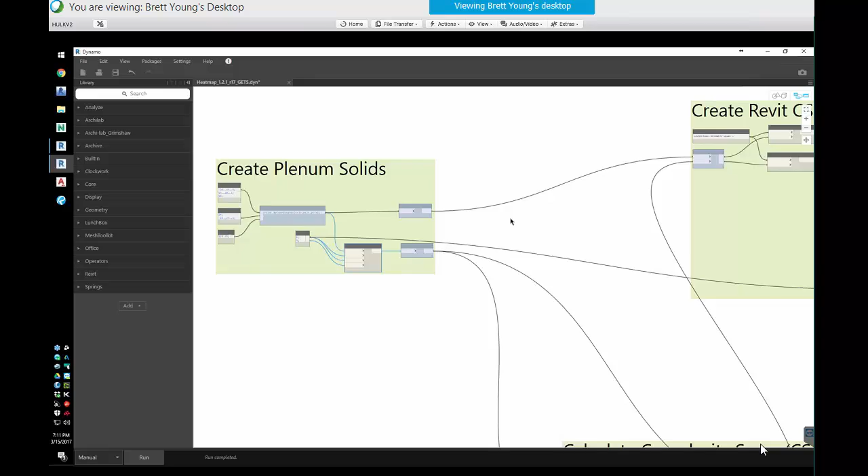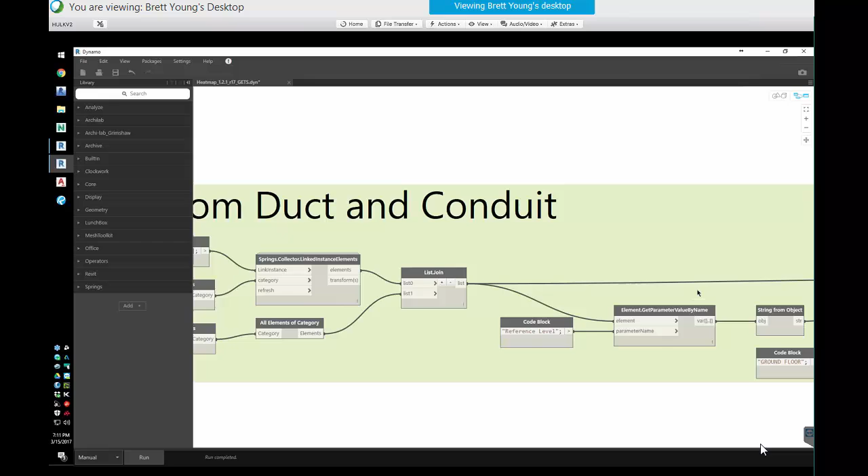So what we're doing is using Dynamo again, because I need to get my ducts from my link. So we bring in the ducts from my link, and I have conduits already in my native electrical Revit model. We bring them together here, and we filter them out just on level 1 to make it faster. I don't want the whole building. And we have a list, right? And we make solids from the Revit geometry of the MEP systems.

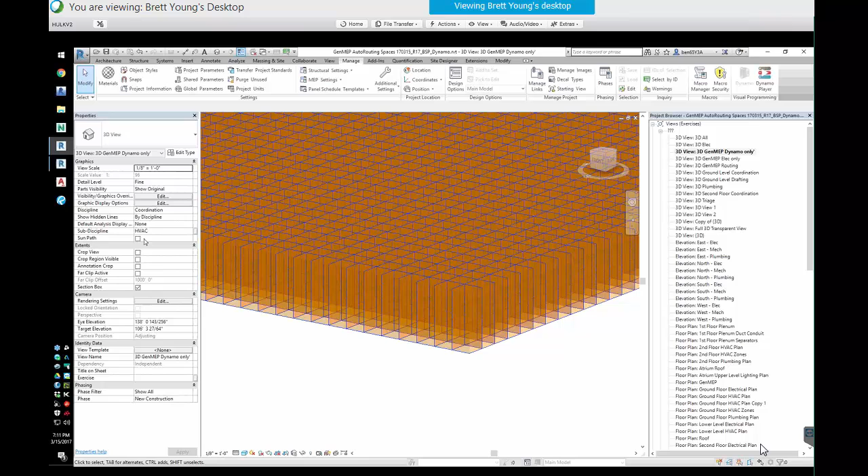Then I want to build a scoring column, basically, create Plenum Solids. And what a Plenum Solid is, I call a Plenum Solid, is this thing. These are Plenum Solids, 1 foot by 1 foot by 3 foot tall columns of geometry. So I want to make that at the proper spacing of this building.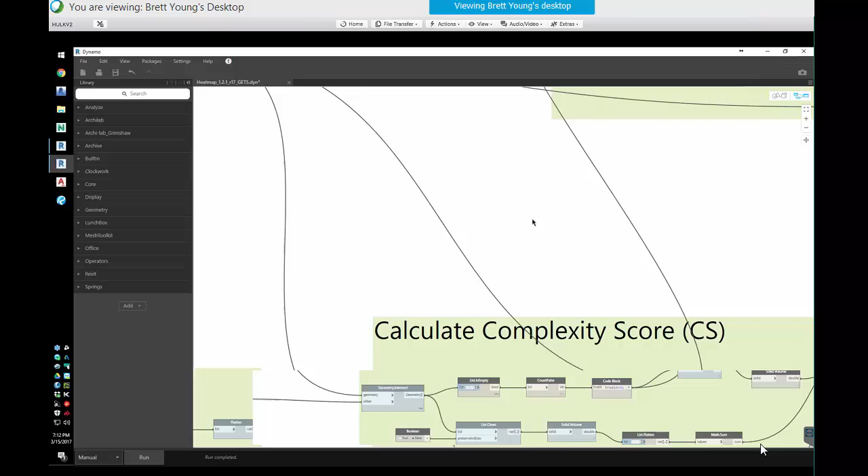We can take a look at what happens when you try and find the intersection between all the geometry on the first floor and those columns. You get a certain amount of space that's taken up as intersection space, and I think this is pretty cool looking, so we'll see how it looks. Those columns get chopped into pieces, so we have ducts and little pieces of conduit and everything else in between, broken into 1 foot by 1 foot cuts from the top.

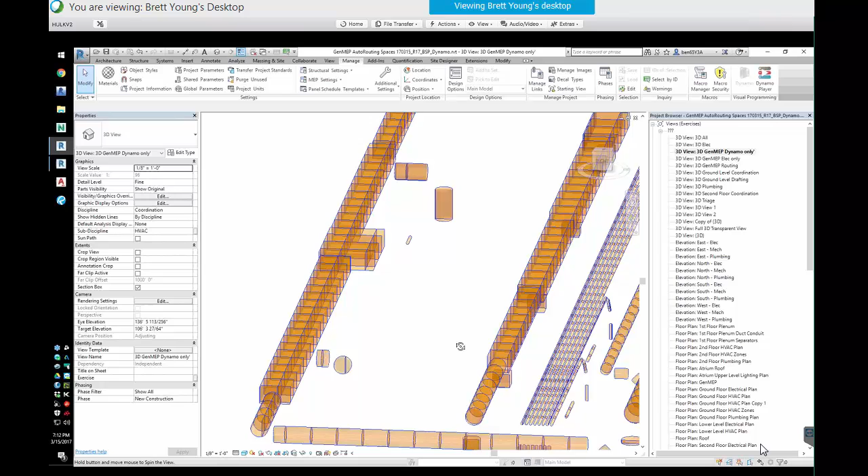And where we take that is add up the volume on a column by column basis and divide it by the total volume of the column, which gives a complexity score. So if we're looking in this bottom left corner, this round duct looks like it's intersecting with 2 different plenum columns, right? You can see it's cut kind of in the right third.

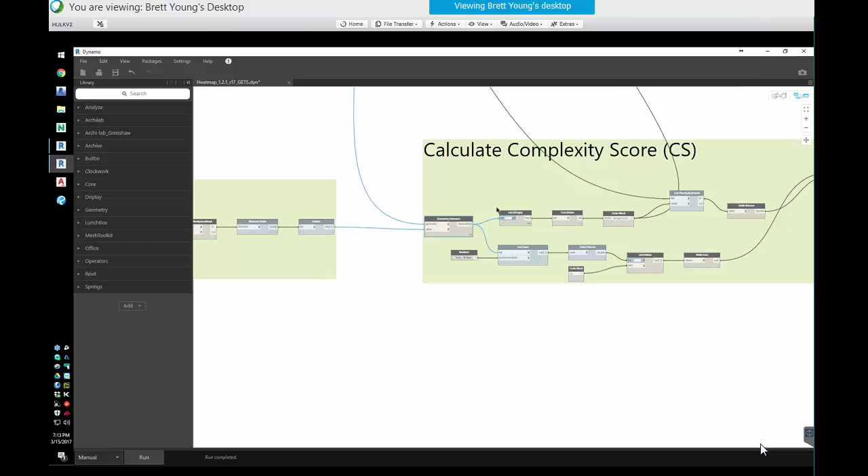Hey, stop. Okay, so I'm using TeamViewer because this laptop doesn't have the RAM for this.

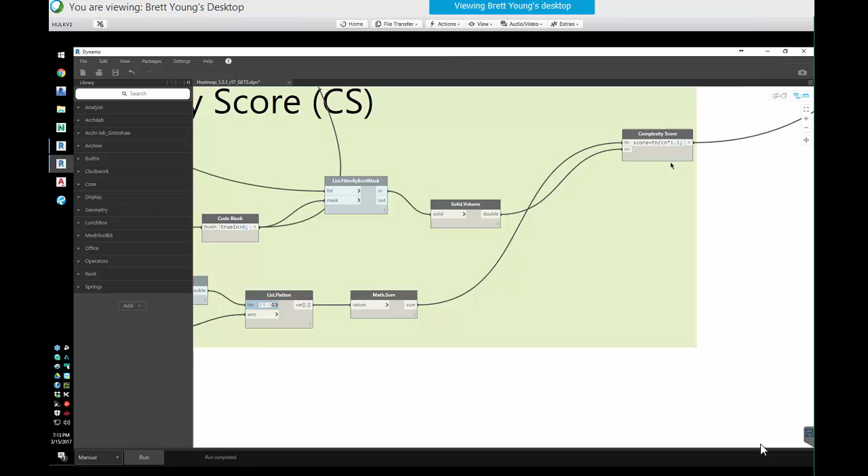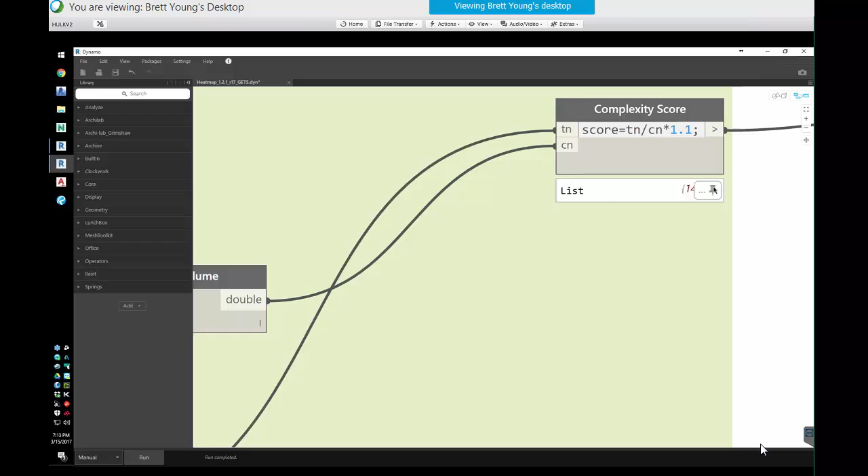So, complexity score: we create the geometry intersection points, we add them up per column of plenum volume, and then we create a complexity score, which again is intersected volume divided by total volume. Total volume happens to be the same number for everything, because they're all 1 foot by 1 foot by 3 foot things. But if we look at complexity scores, they're on a 0 to... these are percentages, right? Percentage full.

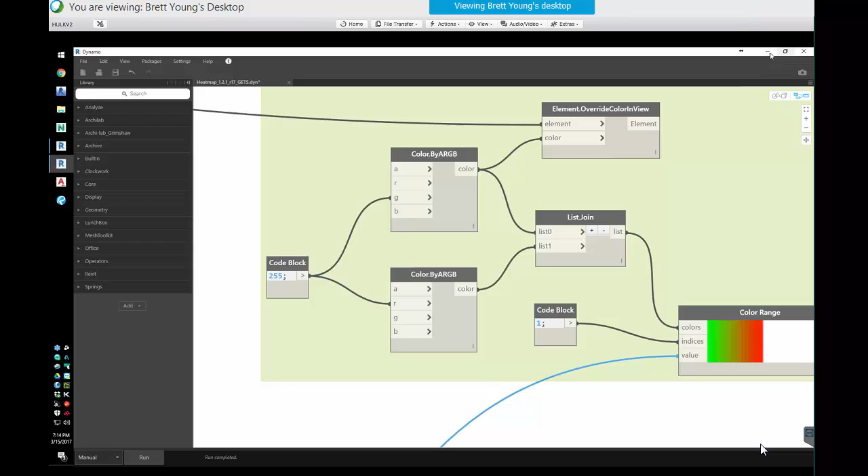And we take that percentage full per 1 foot by 1 foot grid and feed that into some more Dynamo nodes over here that do color on top of Revit families. So it's not super complicated, but it is very interesting to look at the changes that happen in a project as complexity, as more systems get put in the way.

I'm going to bring up this one. We'll take a look at both of them. Hey now.

So if the architect has raised ceilings in certain areas, does this detect it? Right now it's really manual to say, but yes, it could. Just by the bottom bounding of those columns can be changed and should be changed for different ceiling heights.

The way we really think about it is maybe a user would create a Revit space from the drop ceiling to the floor slab above in the whole plenum area, and those heights can vary, right? I just want to chop that into a 1 foot grid. I don't care what the height is, and the math will change, right? The volume divided by the total volume of that column will be variable because the column is changing. In this example, they're the same.

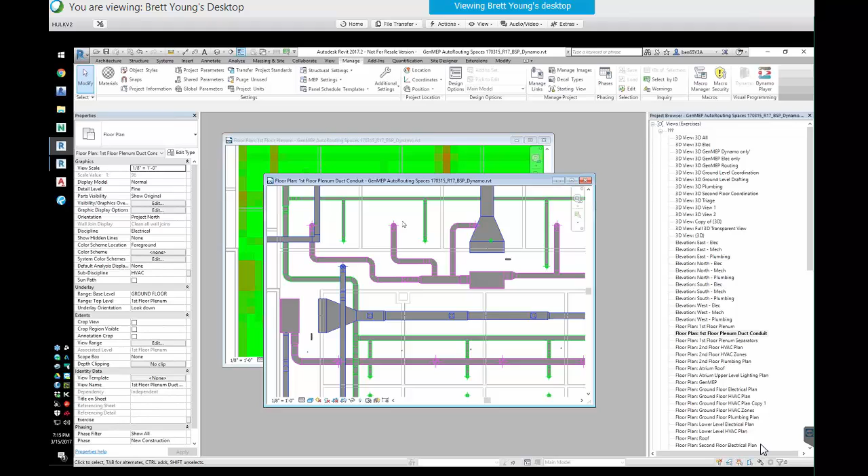Okay. But yeah, you would create a Revit space and then chop that up into 1 foot, or even more resolution if you want it. I can talk a little bit about where we've taken this and adapted it. So Ben has written in Dynamo kind of pseudocode or code in Dynamo. And what we've done is we've then taken that code and converted it into C#. And so over time, this will change quite a bit.

So for example, one change we've made is the green and the red don't make a whole lot of sense without a third color, because you can't really tell. It either goes really green or goes really red really quick. And so we need an intermediate color of yellow to really be able to distinguish where it varies over the course of the floor plan, right?

So that's one change that we've made, and then we're also doing that to be able to pick up where the ceiling height is and pick up where that goes, as well as being able to refine the resolution so that you can run it overnight, and it'll take a couple of hours, but you can get it down to a 2-inch as opposed to a 1 foot resolution, and be able to go and track that and look at that.

The importance of really what this is, though, is what you're looking at is the beginning of machine learning applied to clash detection. Because with clash detection, we're getting too many clashes, and we need to prioritize them. And one of the ways that we can prioritize clashes really well: clashes that are happening in a high congestion area are a higher priority because they're harder to fix.

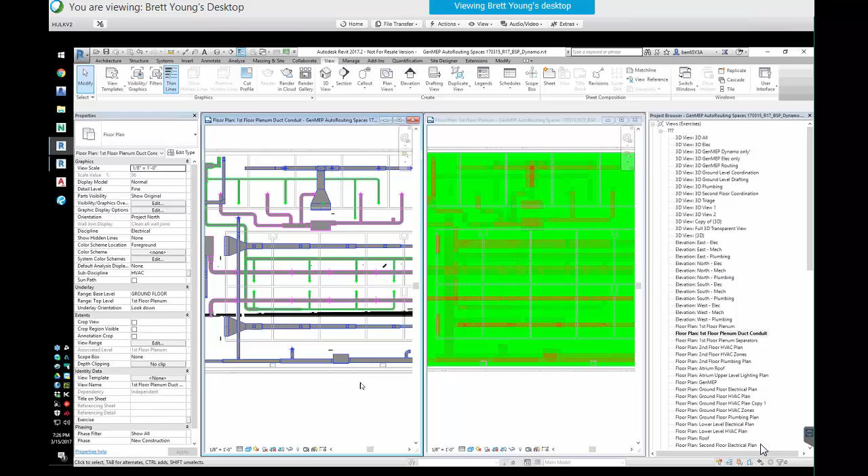Another example would be being able to route conduit within the deck, in the concrete, or not in the deck, right? Because if you put it in the deck, you lower your complexity, you lower your congestion because you're out of the area, and then you can quantify that with numbers now. So I want to have time to show you so you can get back to me and give me your feedback on this. If you go back one.

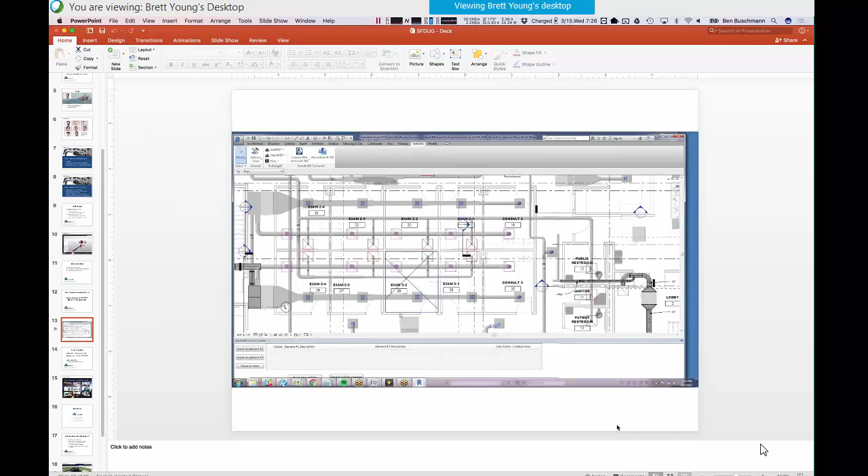Okay, so we have this program called ClashMEP, and I'm going to show you what ClashMEP does. And we want to integrate it into Dynamo. The integration into Dynamo is not hard to do, but we want to find out how you guys want to use it and what you're going to do with it so that we can make sure we're giving you everything that you want out of it. So here you have Revit, and ClashMEP does real-time clash detection within Revit.

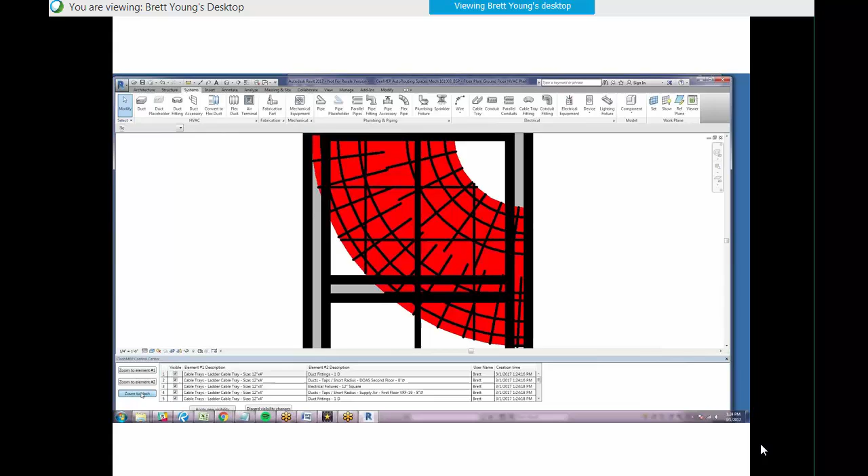And so here we're hiding the mechanical system, and then we're drawing in a cable tray and looking at the clashes, and then dynamically declashing it as you go, right? And so there's your cable tray, and you can see down below in the table there's a list of all the clashes that cable tray hit, and we're graphically showing it on top of the plan within Revit. So that's a clash with, it looks like a duct, and that's a clash with a unit of some type, right?

And so the question we have for you is, how should we tie that into Dynamo? What do you want to be able to get out of Dynamo using this type of thinking? Because we know that you're probably going to want to take that clash item and do something with it, but we can't predict what you want to do with it, right? So you just changed the elevation of that. Yeah, that was an elevation change. You can see that it's into the ceiling because the entire thing turned red. And then we're going to raise it up until it clears the ceiling, and then we'll adjust the cable tray down.

So Dynamo already could iterate over this elevation until the clash is less, right? I don't think that's the question. The question is, what do you want to do with a clash event in Dynamo? Can I use this in conjunction with GenMEP? If I have a clash, I want Dynamo to go and break before and after, and then use GenMEP to run my start and end target over that structure. That would be one.

So what information do you need from us to be able to do that? And thus this information is feeding into Dynamo and then generating a basic heat map. And then you can start moving this towards the cooler areas. But in some ways, once you've gotten to this level, the end result maybe shouldn't be Dynamo. It seems like Dynamo is that great setup for figuring out what you want to do.

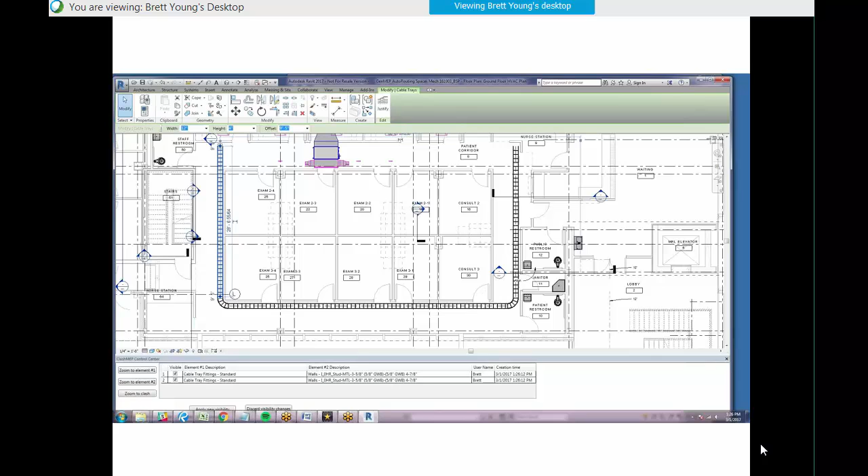But once you've coded this, and I think this is what we got out of our last meeting and this discussion on programming in C#, eventually you're just going to write the program that just starts to do it. Yeah, I think you're right. But we want to take advantage of people out there in the world who know Dynamo, right? Because you don't want to wait for us to go and code stuff. I see what you're saying. Yeah.

Right? So we want to provide the API that gives you the ability to connect that to Slack and have somebody go and take care of a clash, and it informs somebody through Slack to go to Trello or whatever it is. Right now, these fields are not queryable, right? I mean, the point is that we can open these fields up to query, right? Well, I guess what we're really trying to figure out is how much information do you want out of that, or what information is important?

Yeah, the where and the how much. I think for that information, you can unpack it in a way that you can start feeding that in. Otherwise, you don't really know what you could do with it. But the more that you can take from it, like if it's generating a spreadsheet, that's one way that you can have some interoperability with Dynamo. If it's actively writing something that's then actively being read and running through something else, that's the part you kind of have to discover once you have it in front of you.